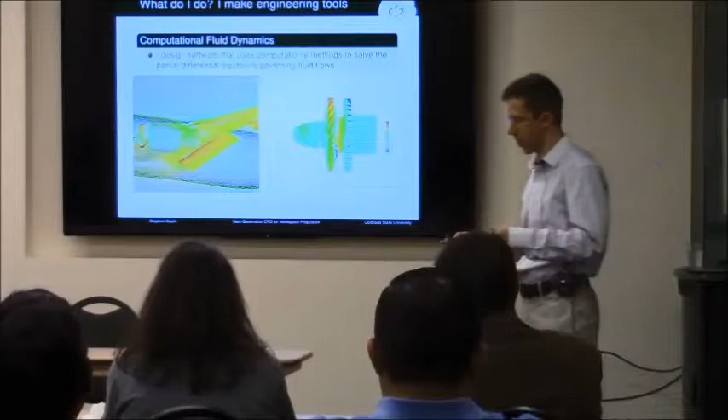What exactly do I do? What is my purpose? I make engineering tools - that's my mission. I work in the field of computational fluid dynamics. We all know fluid dynamics - the equations that govern fluid flow are very much mechanical engineering. How can we explore these equations? We can use analytical methods, experimental methods, and over the last couple of decades, we can also use computational approaches - solving the mathematical equations on computers and looking at how the fluid behaves.

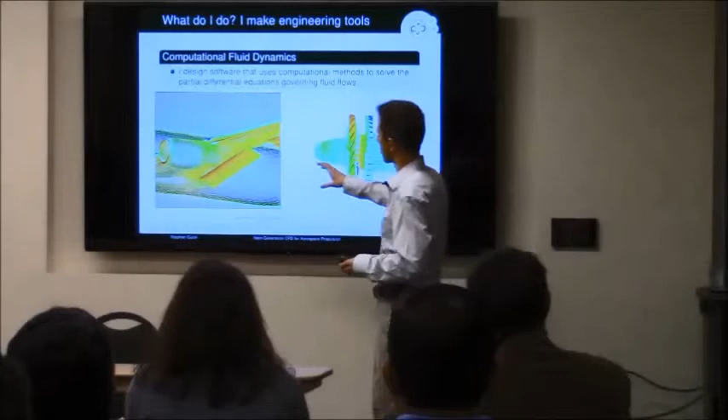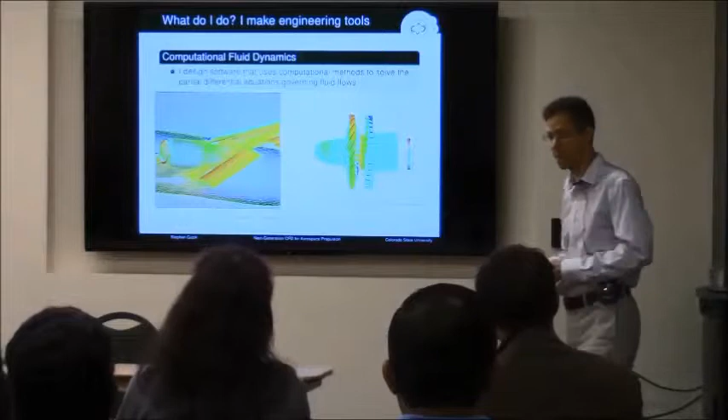The standard technique is to solve these equations at discrete points in some domain, which usually involves creating a grid. Here's a grid shown wrapped around some geometry, from Dimitri Mavriplis at University of Wyoming. It's nice to have him nearby because he has a lot of experience - he spent 16 years at NASA and is doing great work on rotorcraft and real aircraft geometries. So you create a grid, then solve your equations at these discrete points, and throughout my talk we'll go into detail of what that entails.

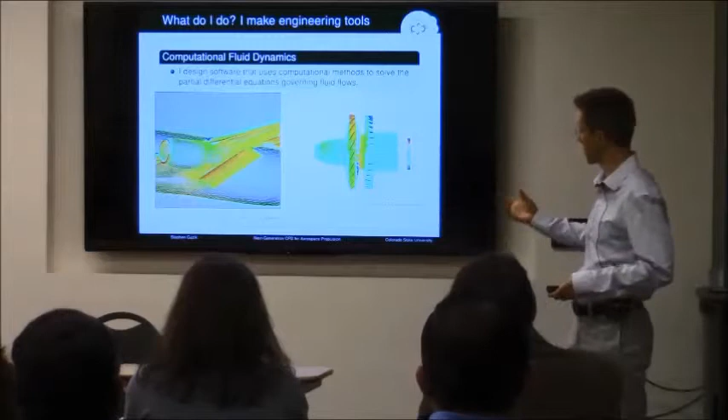On the right is shown a simulation - so what do we do with computational fluid dynamics, especially in propulsion? We try to solve some kind of turbo machinery, and we see that here with the simulation done by Nate Spots in our group.

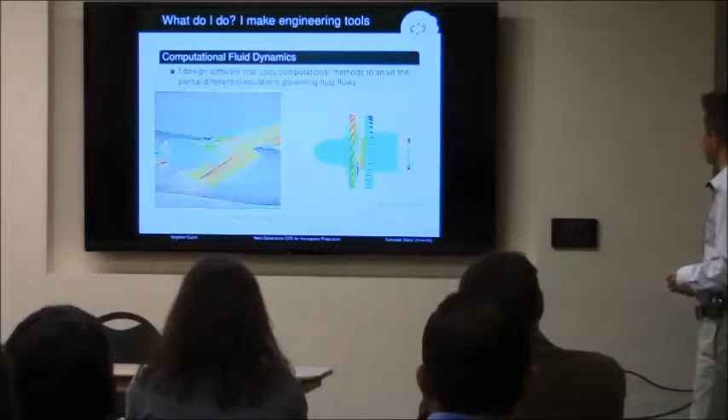And so now I want to talk a little bit about the history of CFD. So where did it start? Where are we at right now? I've taken these slides from a talk by Anthony Jameson. Partially, my intent is to appeal to authority for these slides. Jameson is actually quite an internationally recognized expert in CFD and has been involved pretty much since the beginnings.

So the timeline here, you can really see that it kind of takes off at the same time that digital computers take off. We had digital computers maybe back in the 50s, but by the 1960s, more and more people can use it. And it was really in the 1980s to 1990s period where the theory behind the CFD that's mainstream nowadays really took off and was really developed.

And here you see all the big names. Well, Godunov was earlier, but Van Leer, Roe, Jameson again, Harten. These are where the main contributions to CFD were actually made in this period.

So it seems like, what's happened since then? I think this is a little bit self-serving, what Jameson has written here. It's actually next generation CFD that's kind of taken off between 2000 and 2010. And indeed, I would agree that aerodynamic shape optimization, or any type of multidisciplinary, multi-physics coupling of different kinds of solvers together, that really was the domain of 1990 to 2000.

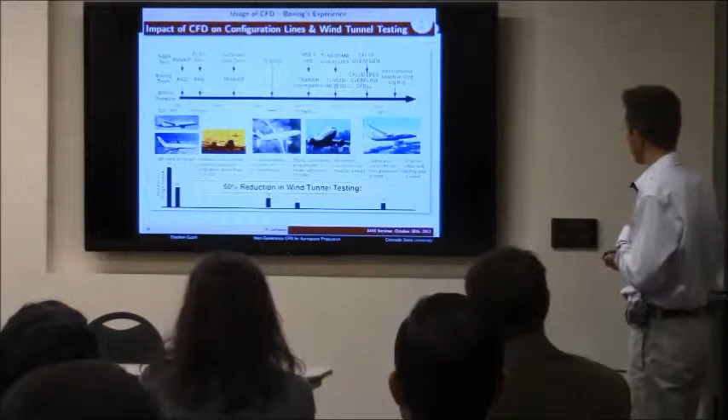Just a quick illustration of how this is practically used in industry. Jameson worked quite a bit with Boeing, and this is his outline of how CFD has helped them with their design of aircraft. A couple things to note: one is, the main idea here is that if you can do the experiments on the computer, it reduces the amount of testing you have to do in the laboratory itself, so hopefully it'll save you some costs.

And perhaps you can even do more high fidelity designs on the computer too, especially if you can couple your CFD solver with computational optimization. But a kind of curious thing is that the state of the CFD software, TLNS, that actually means thin layer Navier-Stokes, so they're not even solving the full Navier-Stokes equations. Even up to 2000, most of their designs are still using fairly older technologies, things that were developed in the 60s, or perhaps the 70s. So that's kind of interesting - a very conservative kind of industry.

They're just kind of transitioning right now at this time to even being using full Navier-Stokes solvers to do the design of their aircraft. And when we do work with Boeing, it's kind of in this area, working with their codes. Overflow is one that they love to use. So when we collaborate with Boeing, that's kind of what we do.

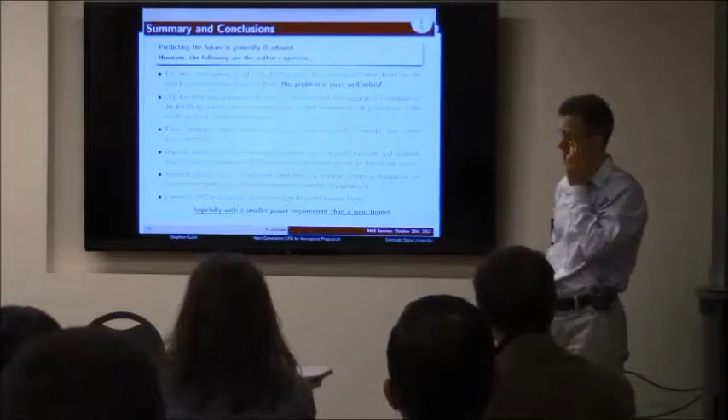But so where's my purpose? Where do I live? I'm kind of off in this field here, sort of developing the next generation of software coming up. The keyword here is adaptive grid, these new technologies that are coming online. So that's one thing I'm going to talk about a lot today. And then these are his summaries and conclusions - probably the most informative of his slides.

The first thing is, why did aerospace engineers get involved with CFD and drive the initial development of the technology forward? It's because, at least in his opinion, they had to solve this problem of transonic flow across a wing. As the airflow goes over the top surface of the wing, it speeds up, and at the speeds aircraft are flying, it can get weakly supersonic, and you can get a weak shock forming on top of the wing. That can have a dramatic impact on the lift and drag characteristics of your airfoil. So it was a difficult problem, and they needed computational tools to solve it. That's what motivated the development of all these algorithms, and that's why aerospace engineering kind of took hold of this problem and drove it forward for the first couple of decades.

But then something interesting happened between the 1980s and now. Well, maybe for the last 15 years, he says, the state of the art stalled. These second-order accurate finite volume methods solving the RANS equations kind of became the norm for doing any kind of research, and there was not really any advances since that period. You look at all the standard solvers out there, Fluent, CFD++.

These are second-order accurate, and they're solving the RANS equations. What does RANS mean? That's a turbulence model. So when we solve the Navier-Stokes equations, those equations themselves hold the full physics of turbulence, but there's something called an energy cascade. You can imagine these large turbulent motions get to smaller ones, and smaller ones. At the very smallest scale, those turbulent eddies are dissipated by viscosity. So if you want to solve turbulence with a CFD solver, you have to model that very finest scale.

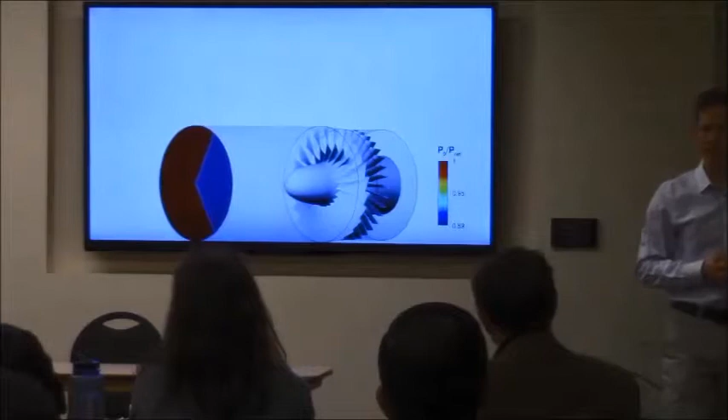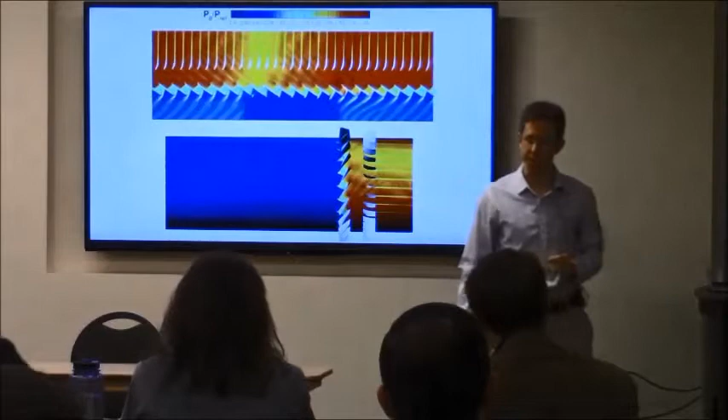Nate did a tremendous job in making this movie, I think. It's quite fascinating. And this is the old stuff, right? This is your standard second order finite volume. One question to ask is, we can always make pretty pictures with CFD, but is it correct? Is this actually what's going on?

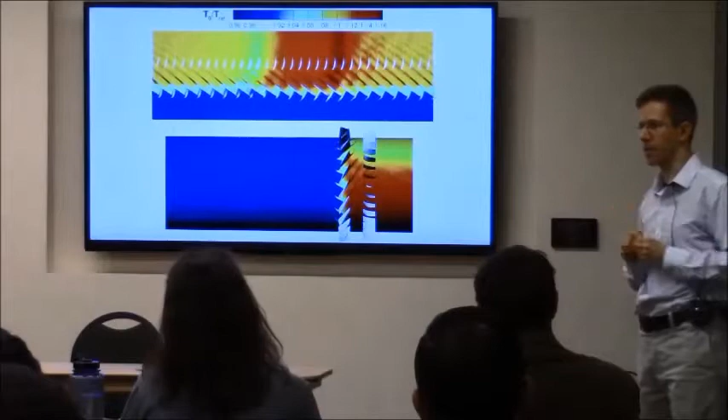In this case, yes, we have fairly high confidence in this simulation. And that's because we have a fairly simple distorted flow coming into the inlet. But if I was actually going to try to solve the real problem, the actual separation of the flow, our standard second order finite volume methods cannot handle that problem.

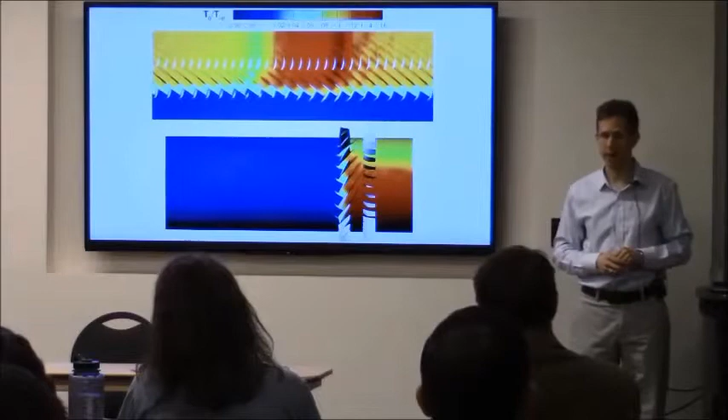So why is this kind of problem important? It's because we need these higher level capabilities so we can better optimize our aircraft, so we can better improve the fuel efficiency of them. And why is this suddenly so challenging? Why can't we do this with standard second order finite volume methods?

There's a lot of physics going on here. For one thing, even if the aircraft is stationary and you just have a crosswind going across the inlet, as it spools up and the air wraps around the lip of that inlet, it can go to supersonic speeds. So you can get a wide range of Mach numbers in this simulation, all the way from 0 up to supersonic flows, and you have to be able to deal with that.

The flow is transient because there's hysteresis in the engine mass flow rate at which the separation occurs. And that depends on whether you're ramping up the engine or spooling it down. So that'll change where your separation pattern occurs. And what that means is you actually need a true unsteady solver. You can't appeal to any of these steady state solvers to handle this problem.

The turbulent flow itself is complex, three-dimensional, with separation and reattachment. And even getting that is not sufficient. You have to actually correctly model where the flow transitions from laminar to turbulent. Finally, if you do all this research without the fan in there, the results you're going to get are too pessimistic. So you actually need to understand the influence of the fan itself, meaning you need either all that geometry in there or you need a good model for that.

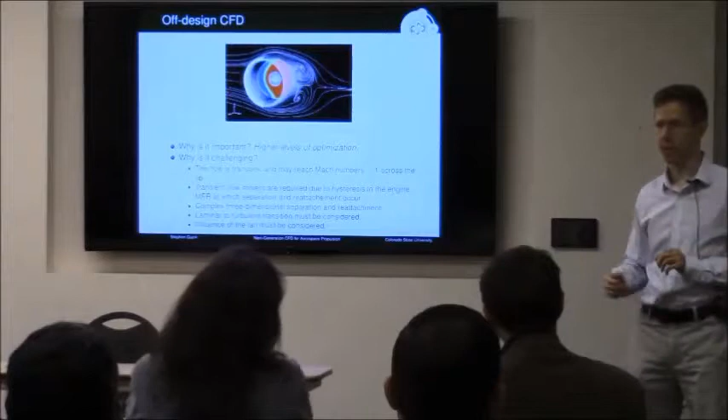And I should say even the simulations that I just showed you, that takes about 10 days to run on the cluster we have here. So they're very expensive stuff, difficult to do design work with.

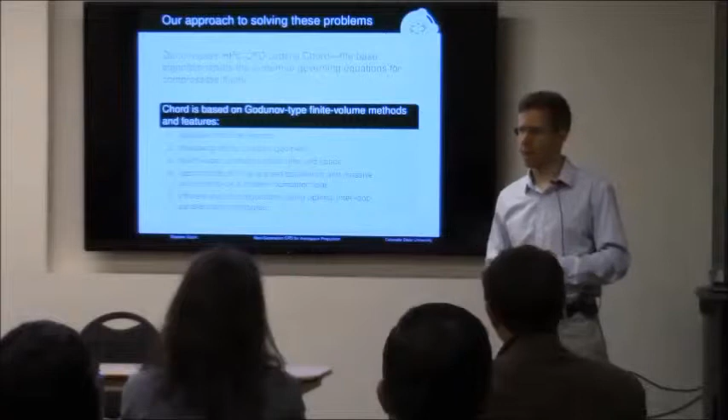And what's our approach to solving these problems? So we have an in-house CFD code called CHORD, which is based on an application framework, Chombo, developed at Lawrence Berkeley National Lab. The base code is a framework designed for doing parallel adaptive mesh refinement. Our application on top of that is designed to do engineering flows, so to do the Navier-Stokes equations with reacting flows. So hyperbolic terms, or the inertial terms, the viscous terms, and reactions.

One of our main contributions is the capability to handle more complex geometries. DOE labs like to do physics studies, which are often done in a very simple Cartesian box, just some neutrons or something flying around.

But when it comes time to do engineering, you need to resolve all those geometries, and they're kind of behind in that context. That's a lot of where my research effort is focused.

CHORD is based on Godunov-type finite volume methods and features key technologies: adaptive mesh refinement and mapped grids. That's the technology I'm going to talk about today for handling complex geometries. It's got fourth order accuracy in both time and space.

There's opportunities for fine-grained parallelism and massive concurrency in a modern computer node, so it's ideal. Other approaches will figure out how to get those working on the new computers too, but structured grid codes are where everybody's kind of targeting their effort. So we're kind of ideally situated for that.

That includes the way we do our stencil computations. We always use a Cartesian grid for doing our derivatives, which means they're very fast in our code. The key detail here is really fourth order accuracy in time and space, and the problem is that this makes everything else more challenging.

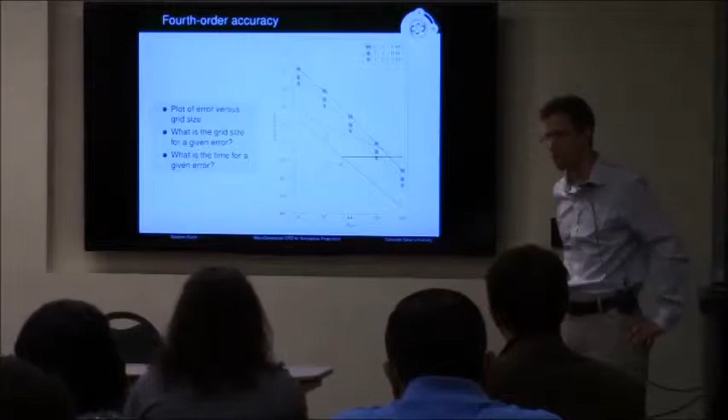Speaking of fourth order accuracy, why is this so important? What do you really gain? You'll see a couple of these plots today during my talk. What this is plotting is, along the bottom, the one-dimensional mesh size. So I'm doing several simulations, one with 16 grid points in a direction, one with 32, 64, 128, and 256.

And then I plot the error in my solution, doing this with some simulation where I know the exact analytical answer. Then I'm solving it numerically and seeing what's the error in my solution compared to the theory. On a log-log plot, the slope of the curve, if I connect all these points, should be the order of accuracy of my scheme.

This is for Couette flow, a viscous solution. Here we have a slope of 4, and we see we're actually getting a little bit of superconvergence in this problem—it's closer to 5 for these curves.

But what we've shown here is a slope of 4 and a slope of 2. A second order code would have this kind of slope. Now the question to ask is, if I need a given level of accuracy out of my solver, what kind of mesh do I need to get that level of accuracy?

This red line here is a baseline saying I need my solution error, for whatever reasons—maybe just for the physics I'm trying to solve—down to 10 to the minus 10 in terms of error. So if I'm running a fourth order code, I can get away with a mesh size of about 64. If I'm running a second order code, I need a mesh size of 256, so I need a much larger mesh to solve it at second order accuracy.

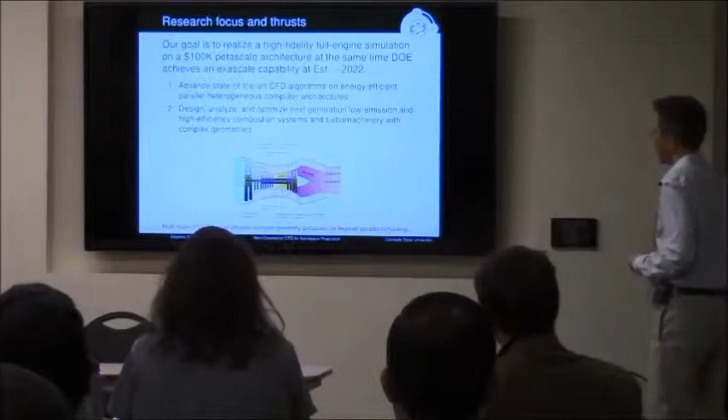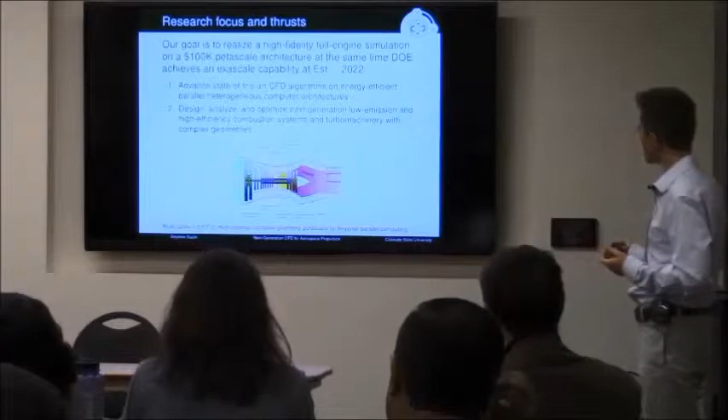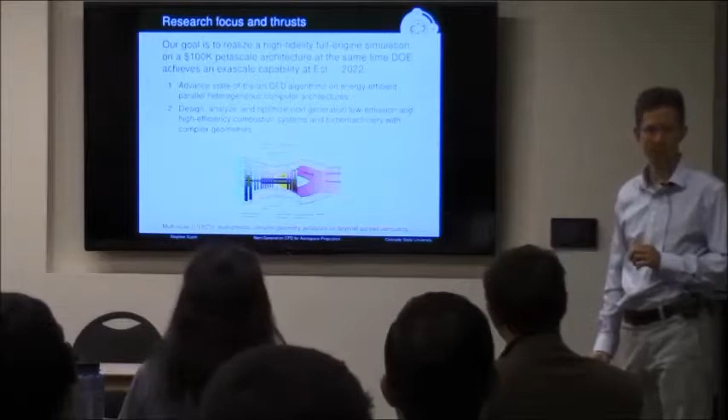So what I do is work on creating this tool of next generation software, and we have a goal in our group too. What that is, is really to do a full simulation of a gas turbine engine within about 10 years. We don't get funding to do this, but we would like to be the ones that first attempt this. That's what keeps us motivated. This is a grand challenge in mechanical engineering that has not been done.

Stanford kind of attempted it back in the 2000s, but there are a lot of approximations in their solver. It wasn't a complete coupled simulation, or a full simulation. They actually coupled several different solvers together to get that scheme working.

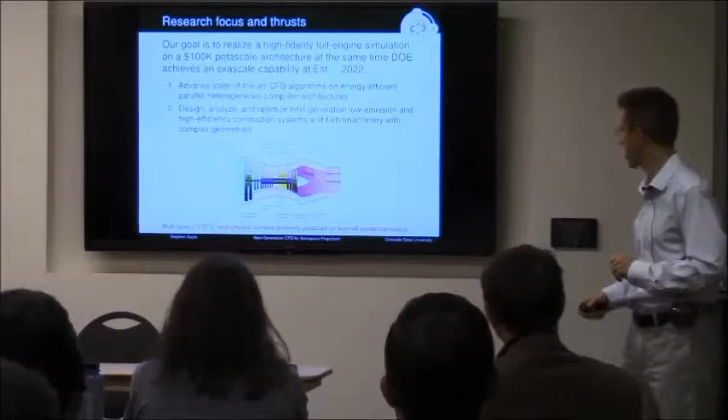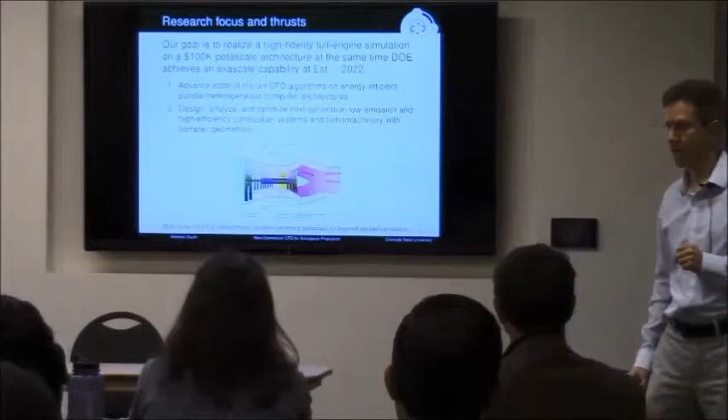Perhaps most importantly for industry, we want to do this on a $100,000 type petascale computer. Well, we can do the components at petascale. You'd probably need an exascale computer to actually do the full gas turbine engine. But this whole concept of $100,000 petascale, what does that mean?

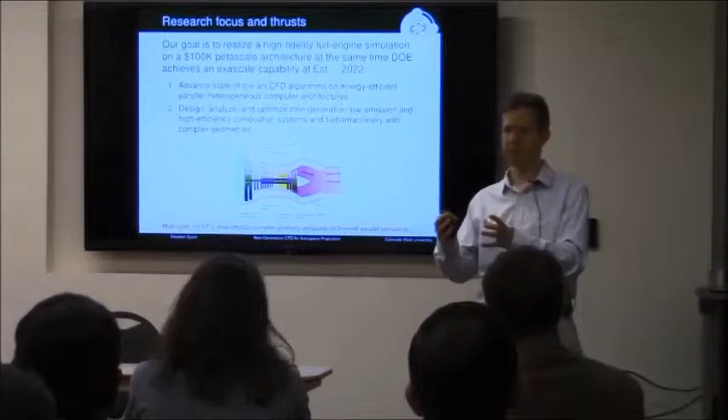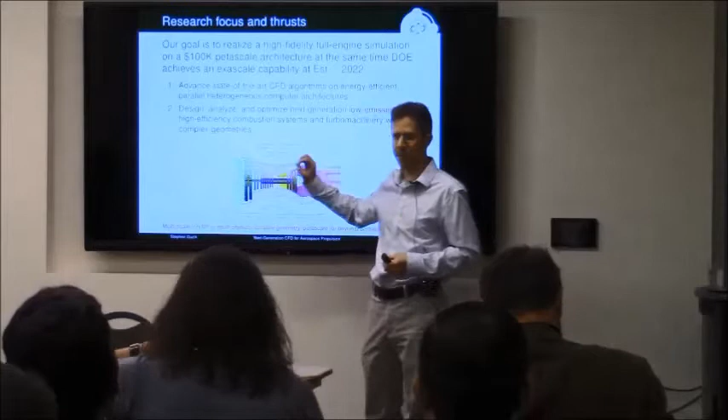Petascale capability, I'll talk a bit more about this later, but that's what you needed to do a laboratory size industrial burner. If you wanted to solve that with CFD, you need on the order of a petascale to do that. So doing this fan with LES probably takes a petascale computer. Doing the combustor probably takes a petascale. You add all these components together, and it might take up to an exascale.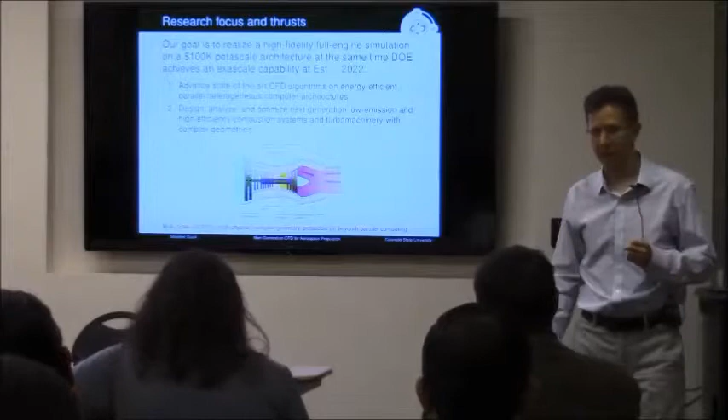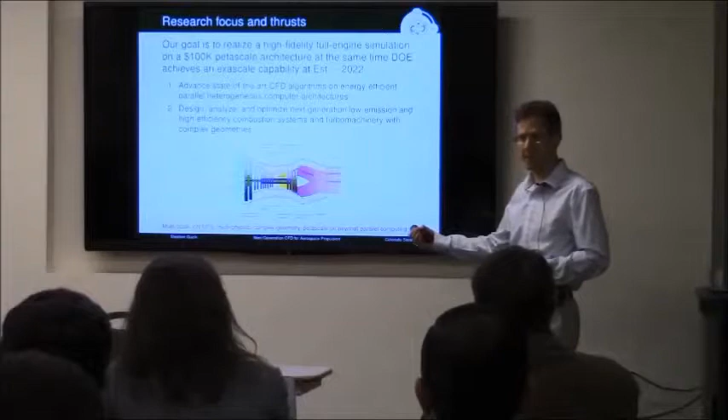What you can do with a petascale is it's been shown that you can really go down and do some really high fidelity physics models, so it's quite attractive. But of course, petascale back around 2010 cost $100 million. As DOE pushes towards a $100 million exascale computer, a 1,000-fold increase, that means we just buy a couple of nodes of those and get a petascale computer that we could actually buy. Woodward could buy that, you could buy more than that, several of those. And then this kind of next generation CFD becomes really attractive both to academia and industry, and everybody's expecting profound breakthroughs from this kind of capability.

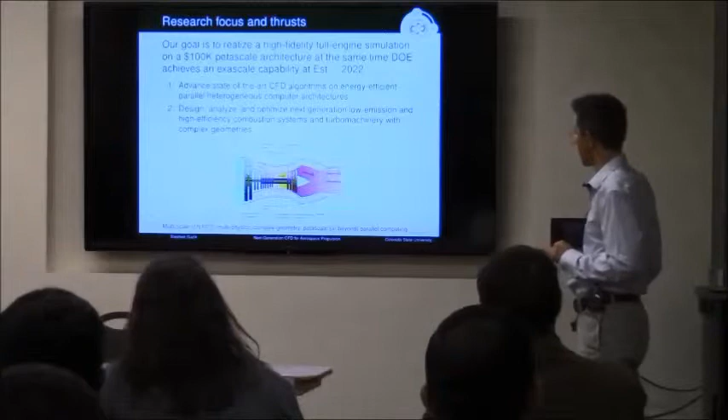That concludes my introduction, and now I want to get into the technical part of just how we solve these equations, and what we're up to in terms of algorithms.

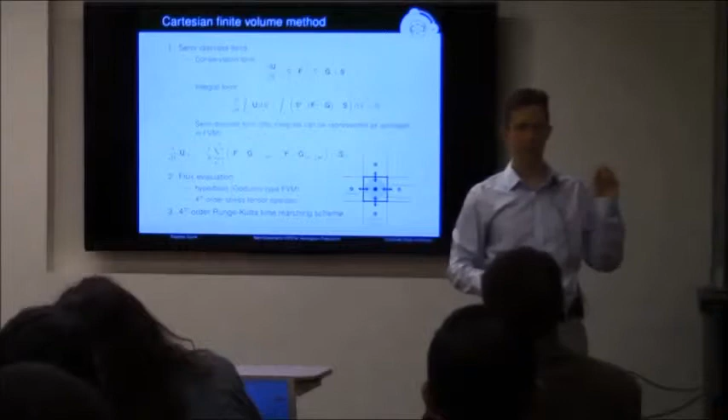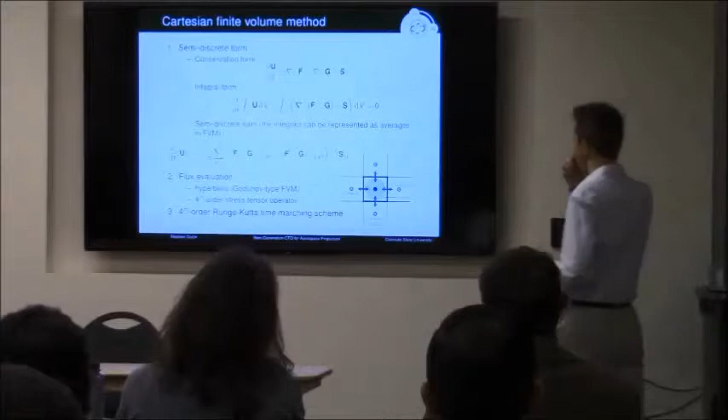So what we're solving is some kind of partial differential equations that represent fluid flow - mass conservation, momentum conservation, and energy conservation. All this is encapsulated in one equation. U is a vector, that's my state, and my terms in there are, for example, density, momentum in my various directions, and the energy in my problem. Then the other terms govern the evolution of these properties in the area that I'm studying.

So we're using a finite volume method. What that means is, it's kind of like if you look at undergraduate fluids, you integrate these equations at some large scale, and you then can apply these conservation laws on a macroscopic scale. We do the same thing, but at a very small scale, and then piece together a bunch of these small scales to do our simulation.

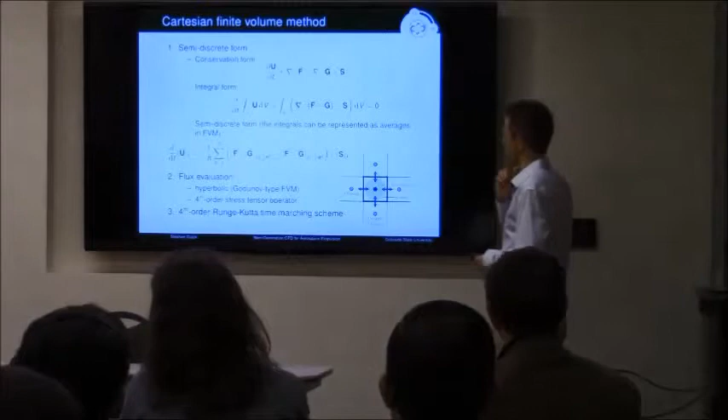So this starts by integrating over some volume in space. We integrate our equations, and this gives us the integral form of the equations governing fluid flow. What happens next? So if nabla here is a derivative, what's the integral of a derivative?

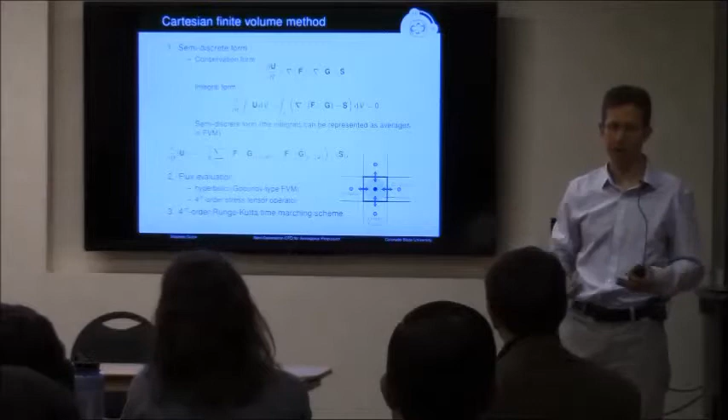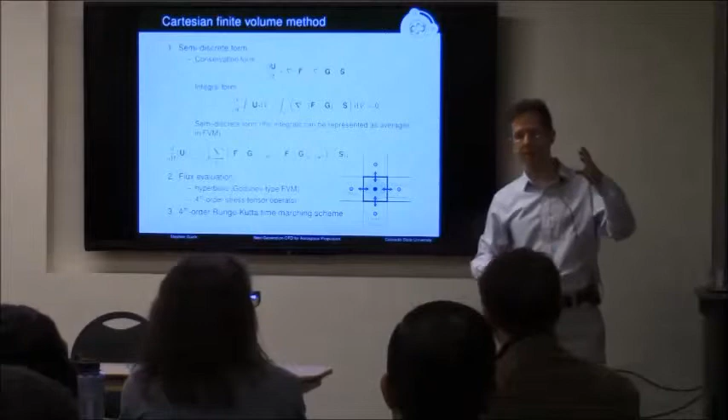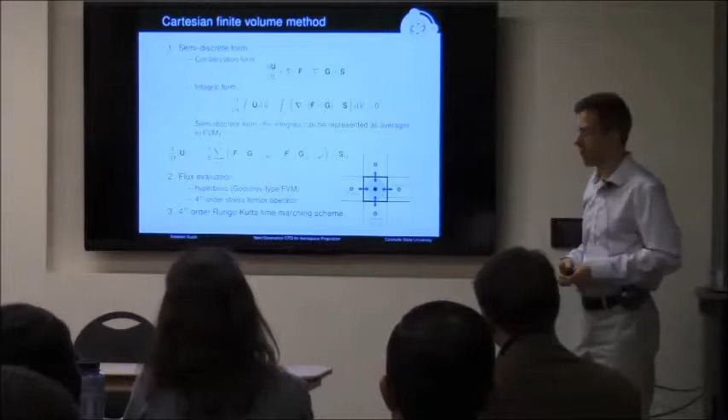They cancel out, right? That's what's going on here. This is actually the application of the divergence theorem of Gauss. It's the same kind of idea - the integrals cancel out, but instead of integrating over my volume, I don't have to integrate this term over the volume. I only have to integrate it on the surfaces of my volume. So I get a one codimension reduction in the locations where I have to integrate.

When we do that, and if we then replace the integrals of these quantities over the surfaces and over the volumes with averages, then I get this resulting equation here. What does this mean? Think, for example, in terms of just mass conservation.

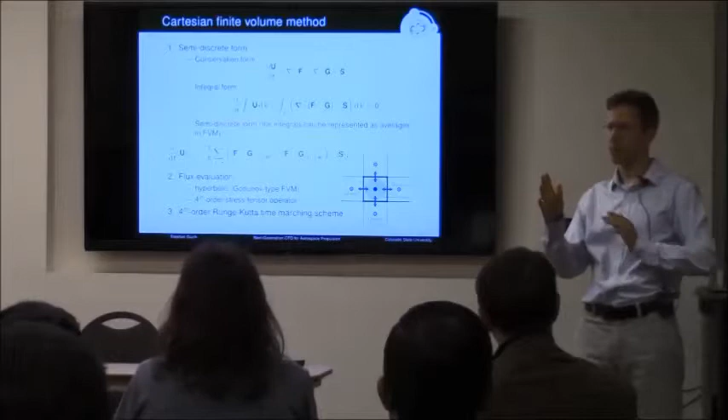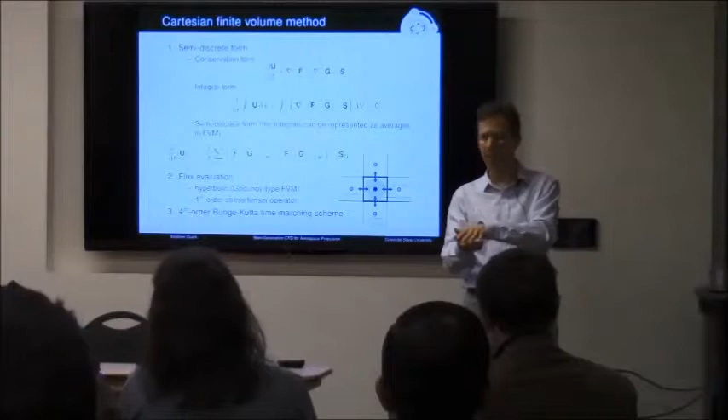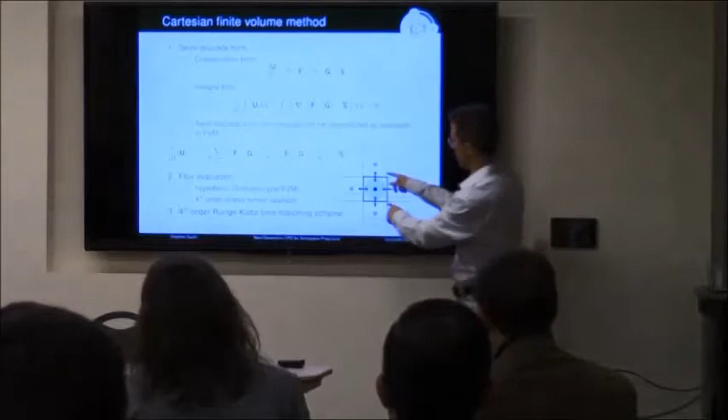So here's my little volume. I'm going to have some quantity - the density of my fluid inside there is my mass. These terms, F and G, are the flux of that mass through the surfaces of this volume. So I could have a little bit of flux moving out one edge. Then how does that change my density inside my volume? Of course, if the net mass flow is going out of the cell, then my density is going to decrease in that cell. That's all this equation is really saying - on the cell, there's an average of my solution state inside the cell, and these terms are the fluxes on the faces of mass, momentum, and energy flowing through the faces of my cell.

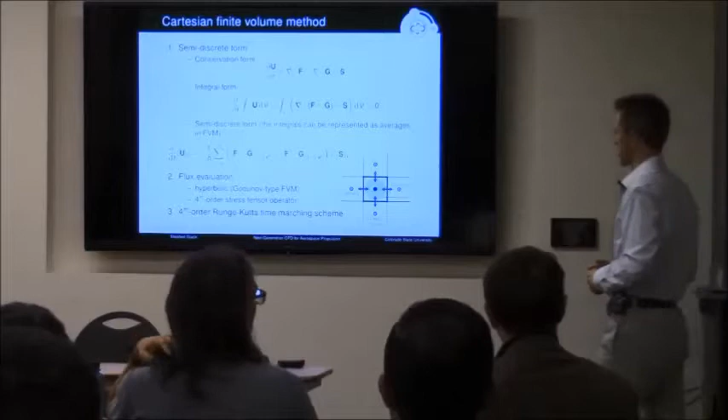Why do we have F and G? We like to separate these out because F is our inviscid terms, so the Euler equations. G adds in the viscous terms required to solve the Navier-Stokes equations.

For the hyperbolic terms, we solve them using a Godunov-type finite volume method with limiting and upwinding.

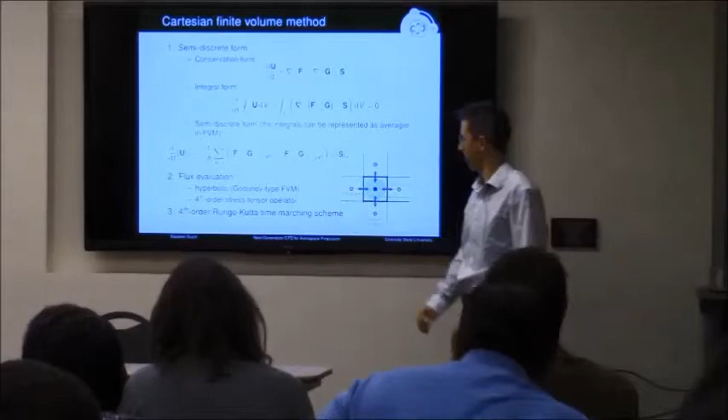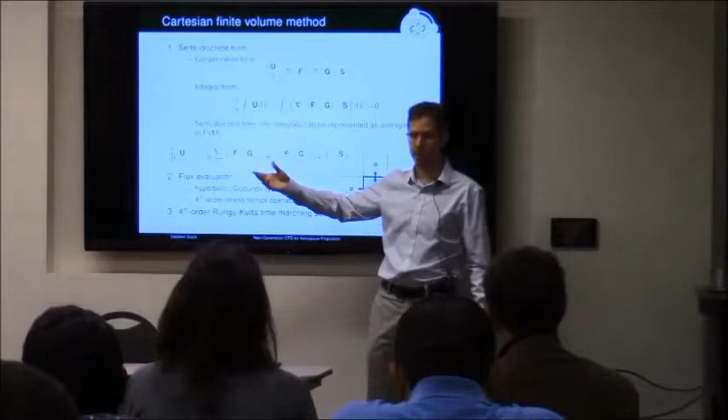G is also done with a fourth order stress tensor to get the viscous terms to fourth order accuracy in space. To get fourth order accuracy in time, we use a method of lines approach, which involves, once we get our semi-discrete form, this actually looks like an ordinary differential equation. So it's not partial anymore, which means I can apply a solver for ODEs like Runge-Kutta. That's what it's designed to do, and get fourth order accuracy in time.

Done, kind of. That's good for Cartesian meshes, but we need to handle complex geometry. The technique we're using for that is to map our curvilinear grid in physical space into a Cartesian grid in computational space.

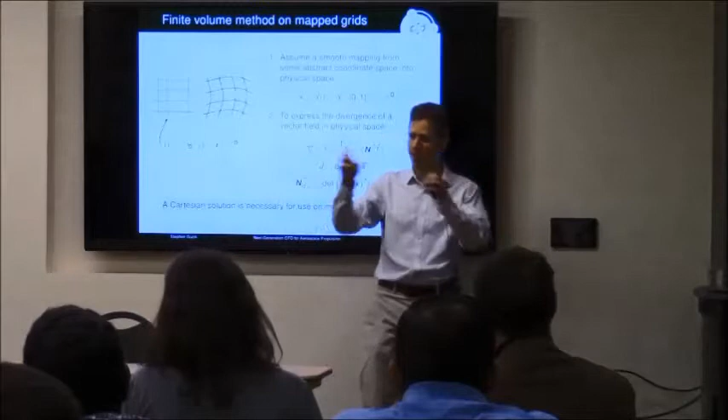So remember I just said that if I was doing Cartesian grids, I was done. Well, if I do this kind of mapping approach, it means I can use all the theory I developed previously, do that on my computational grid, and still have it apply to this twisted grid that's wrapped around some physical geometry in physical space.

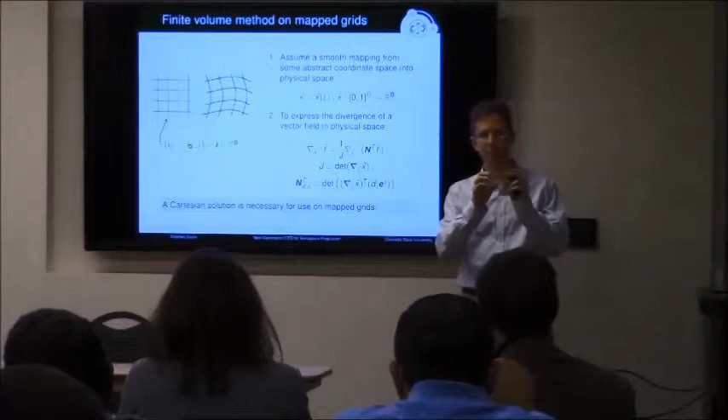All it really means is I have to introduce a few terms that we call metric Jacobians, or metrics, the geometry metrics, which describe that mapping. So J is really your metrics Jacobian. All that says is what's the difference in the cell size between my cell in computational space and physical space.

Let me show you how these are applied. So again, here's our equation that we just saw, the integral form of the Navier-Stokes equation applied in physical space. When we switch to computational space, it's just really a change of variables. You can find this in any undergraduate mathematical textbook.

But you can see everything looks the same. All that happens is that this term J appears in my solution state, and an NT appears that multiplies my flux terms. So then we go through and apply the divergence theorem of Gauss.

So now instead of an integral over the volume of my cell, I have an integral over the surfaces of my cell. So my flux terms are now evaluated on the surfaces, exactly the same as before. And then I replace my integrals with averages, resulting in a very similar equation to what I had earlier, except now there's a J here and still these NT terms multiplying my fluxes.

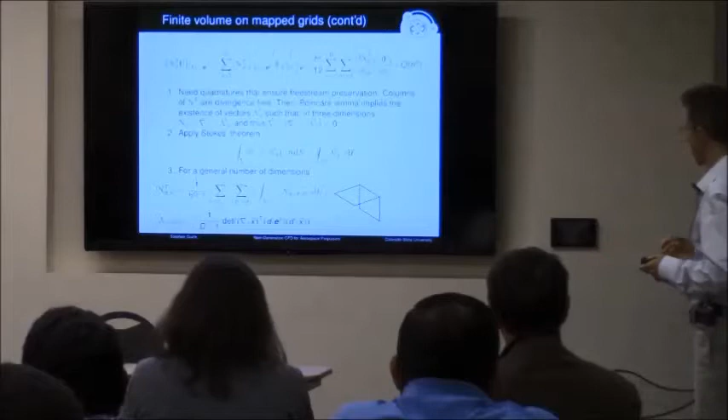Not really too bad. How do we do this multiplication? You have to be careful. You can't just multiply two vector terms together, not if you expect fourth order accuracy and you're working on discrete meshes. So we use this formula here, our product rule formula, we call it.

So the product of NT and F, and the average of that on the face, the key idea here is that if there were point values, yes, you could just multiply them together, but when they're averages over the face, you cannot. You have to be a little bit careful what you're doing.

So to do this product rule, to get the average of the product, we multiply the two values. That gives us second order accuracy. Then we have to add in these derivative terms to raise it to fourth order accuracy. Where does this come from? Taylor series expansion on Cartesian grids.

But now there's some little details we have to worry about. One of these is, imagine in your physical space you have some kind of wrapped grid, and you have just a constant vector field on it. Your solution's exactly constant. What happens when I put this into computational space? I twist my grid a bit. Well, I'm suddenly going to see variations in my solution that aren't really there.

So I have to make sure that I design my scheme so it preserves that. It preserves a constant vector field. And that's very important for doing these mapped kinds of schemes.

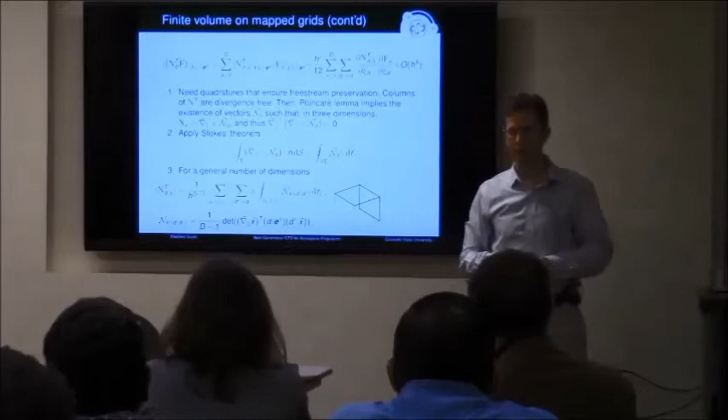This formula here is actually kind of problematic then. So assume F is constant everywhere in my domain. Well, this term, and we really want these fluxes to cancel out. So this term, if F is constant, obviously goes to 0. I'm taking the derivative of F. And then I just have to worry about the leading term up here.

And what this is saying is that we need to devise methods that ensure N times F is free stream preserving. So when I...